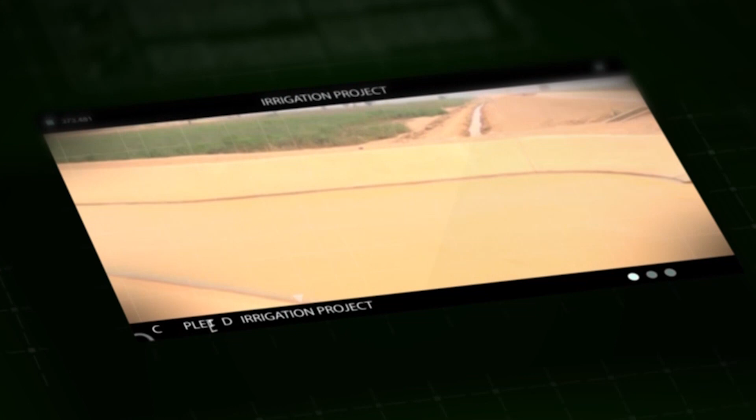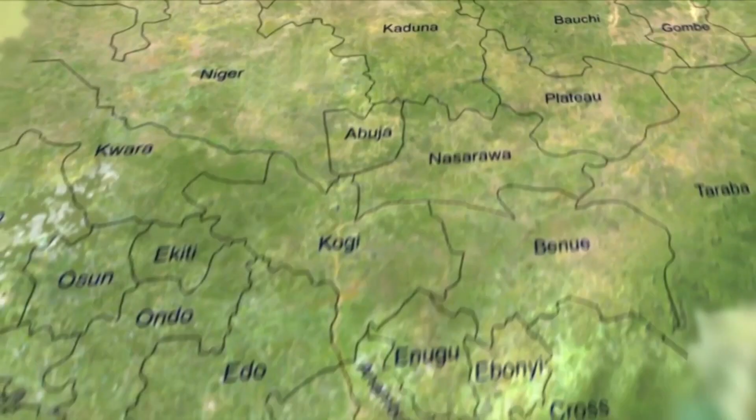The importance of the water resources sector in human life cannot be overemphasized, as it remains dynamic. The strategic position of the sector in Nigeria's socio-economic development has made the Buhari administration place high priority in executing projects in the sector under the Federal Ministry of Water Resources, with the appointment of the Honorable Minister of Water Resources, Engineer Suleiman Hussaini Adamu, in 2015.

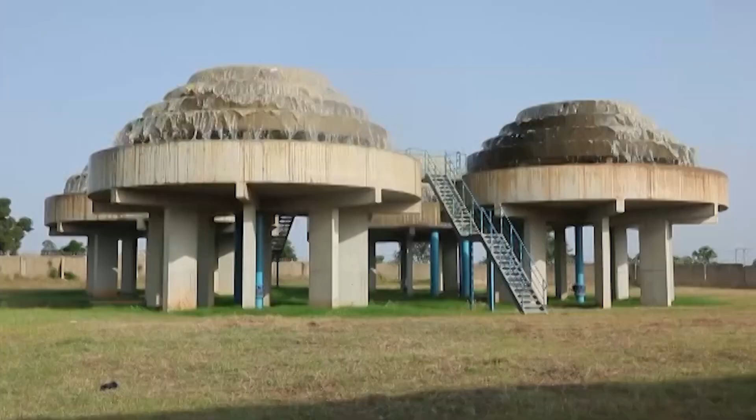As a round peg in a round hole, he went about reinvigorating and revitalizing the sector to enable it to deliver extensively on its mandate and refocus the ministry towards ensuring that the country meets not only its developmental requirements but the United Nations Sustainable Development Goals by the year 2030.

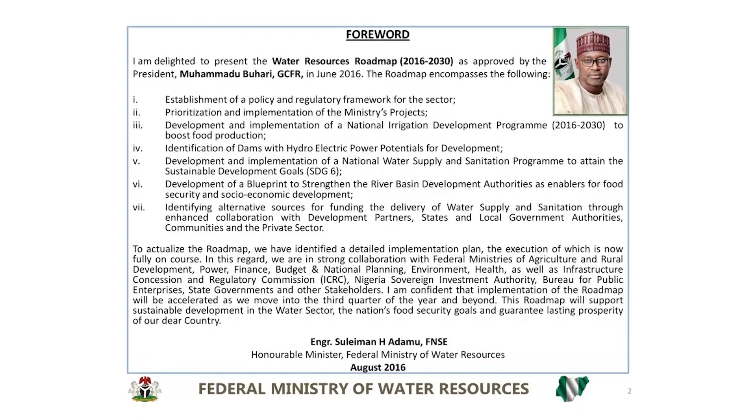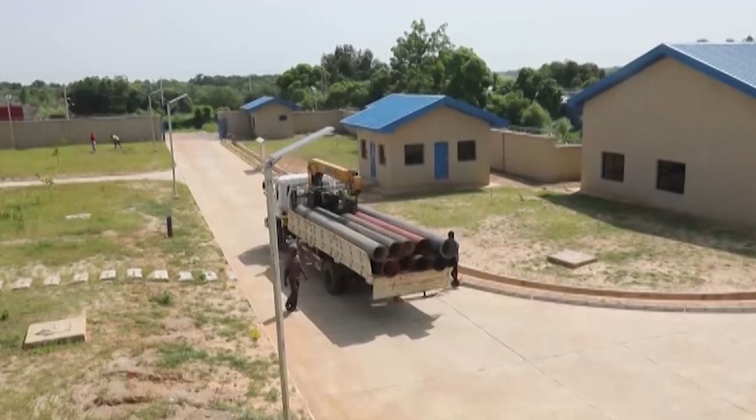A water resources roadmap was instituted by the Honorable Minister to guide the process of revitalizing the ministry. A major component of the reform process is the repositioning, professionalization, and revitalizing of the river basin authorities.

The Upper Benue River Basin Development Authority is one of the 12 river basins established under Decree No. 25 of 1976, amended by Decree No. 35 of 1987, with a catchment area of approximately

257,606 square kilometers. The authority's operational area covers 9 senatorial districts comprising Adamawa Central and Southern Senatorial Districts, Bauchi South Senatorial District, and the whole of Gombe and Taraba states in northeastern Nigeria.

The vision of the Upper Benue River Basin Development Authority is the provision of water for multi-purpose uses within its area of jurisdiction, with a mission of strategic objectives for exploration, exploitation, and conservation of water in a sustainable manner within the context of the National Water Resources Master Plan, brilliantly initiated by the Honorable Minister of Water Resources, Engineer Suleiman Adamu.

He came up with a 15-year program to revitalize the water resources sector, and that's what we're working on. It involves instituting all the necessary policies, legal frameworks, and legislation to move the sector forward,

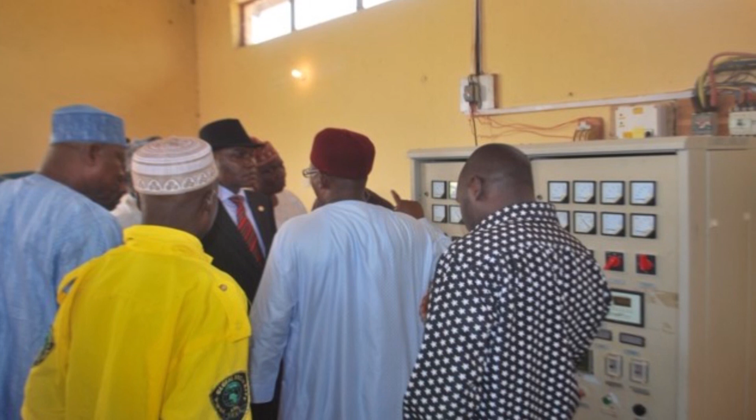The authority has well-trained personnel at the headquarters, area offices, and project sites, with national and international reputation, who have been involved in project conceptualization, studies, design, and implementation of World Bank Transforming Irrigation, UNIDO IC SHP, USAID-sponsored studies, design of hydropower projects, NEWMAP, bathymetric survey of the Benue River, and the National Water Resources Master Plan.

The Managing Director of Upper Benue River Basin Development Authority is Engineer A.H. Moazu, Fellow of the Nigerian Society of Engineers, Fellow of the Nigerian Institution of Civil Engineers. A seasoned engineer, hydrologist, and consummate administrator, he speaks further on the significant milestones of his agency.

Upon coming into office, I gave priority to revitalizing our mandate projects that were existing since the establishment of the organization in January 1976.

When the organization was established specifically for harnessing and development of water resources infrastructure, especially irrigated agriculture for sustenance of the teeming populations of the country, it also engages in community projects whereby farmers can be assisted to conduct their own irrigation within their own farmlands by drilling tube wells, providing them with water pumps, and also provision of farm roads so that farmers can evacuate their produce.

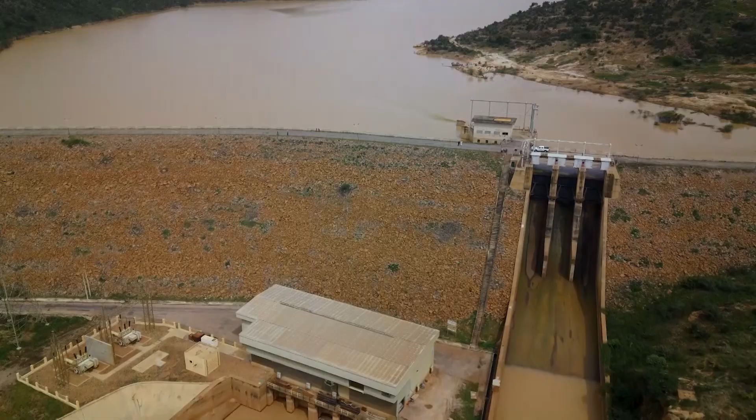Among the numerous accomplishments of the Upper Benue River Basin Development Authority is the completion and maintenance of the Dadinkowa Multipurpose Dam and Irrigation Project located in Gombe State. About the third largest dam in Nigeria, the Dadin Kowa Dam has about 2.8 billion cubic meters storage capacity of water.

It is designed to provide these services: to irrigate 44,000 hectares gross, to generate 40 megawatts of electricity, approximately 259 GWh per year, to produce 20,000 tons of fish annually, to provide raw water to Gombe regional water supply, about

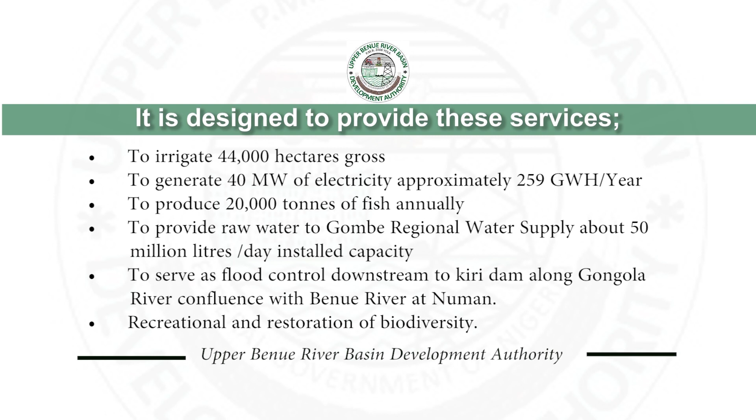50 million liters per day installed capacity, to serve as flood control downstream to Kiri Dam along the Gongola River confluence with the Benue River at Numan, and for recreation and restoration of biodiversity.

Other milestones in the project include the powerhouse for the 40 megawatt hydroelectric power, completed in 2020, generating power into the national grid, ready for commissioning; and 2,000 hectares of land for irrigation by gravity under construction by the World Bank Transforming Irrigation Project.

A 40-hectare pilot irrigation scheme has been established with 2 solar-powered irrigation pumps at Garin Rafi on the minor irrigation upstream of the reservoir. About 10,050 farming families are gainfully employed under minor irrigation schemes, with over 470 tons of grains equivalent produced annually.

4,118 hectares are being cultivated on the minor irrigation scheme at Dadin Kowa Dam drawback area, with about 28,826 tons of grains equivalent produced annually. Through partnership with RIFAN, CBN and Anchor Borrowers scheme, 200 hectares are being cultivated under rain-fed conditions.

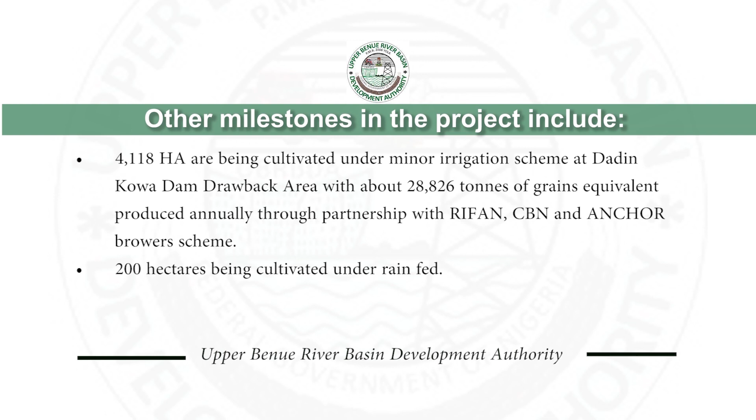It's one of the largest dams in terms of volume, third largest now in terms of volume. The gross volume of this dam is 2.8 billion cubic meters of water at a normal level of 247 meters above sea level. The live storage, that is the usable amount of water you can use on this reservoir, is 1.77 billion cubic meters of water, which is what electricity, irrigation and water supply can tap from.

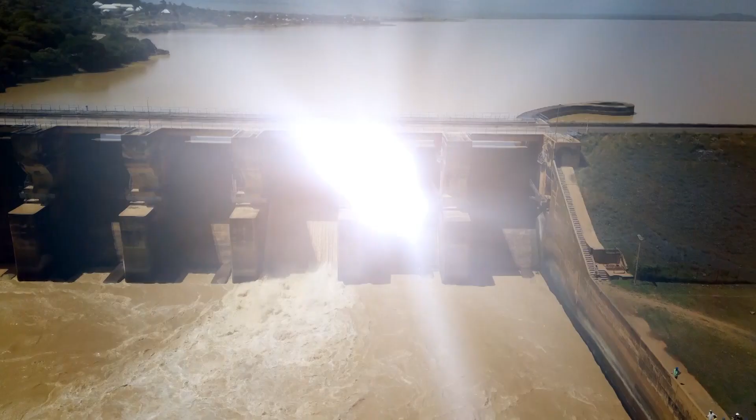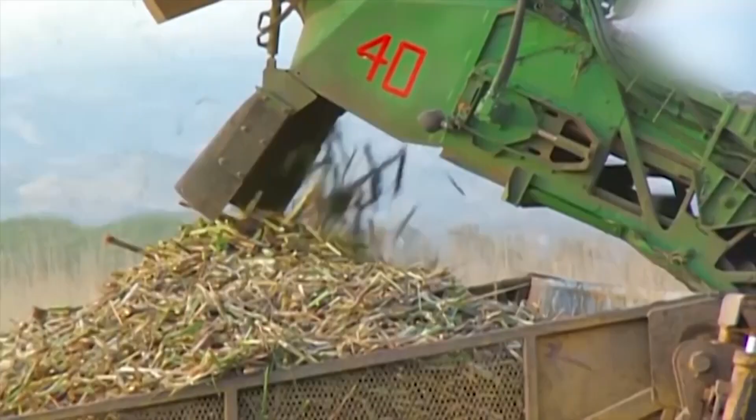Another milestone achievement is the Kiri Dam and irrigation project, Adamawa State. The dam was constructed in 1982 for irrigation of 12,000 hectares for Savannah Sugar Company, now Dangote Sugar Company. Achievements: dam completed in 1982, with 615 million cubic meter storage capacity.

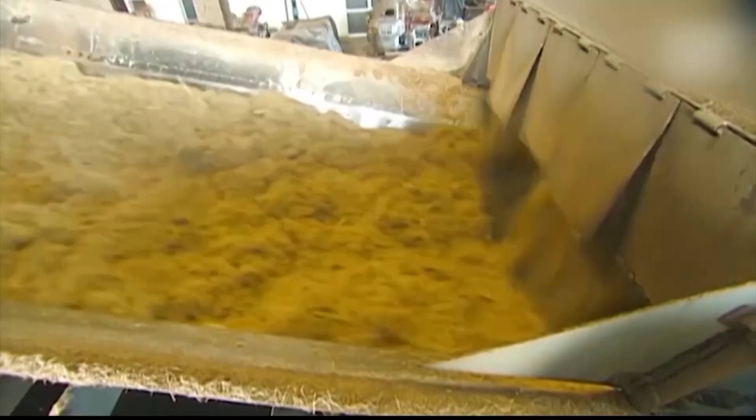Main canal, 13.5 kilometers length constructed. 6.0 kilometers length canal lined. 7.5 kilometers length unlined canal maintained annually. 16,000 hectares of savanna sugar plantation provided with irrigation water. About 150,000 tons of sugarcane produced annually. Over 120,000 jobs created. Fishing development enhanced, with about 12,000 tons of fish harvested by local fishermen annually.

Adamawa State, in partnership with an American firm, plans to produce 25 megawatts of electricity at the planning stage.

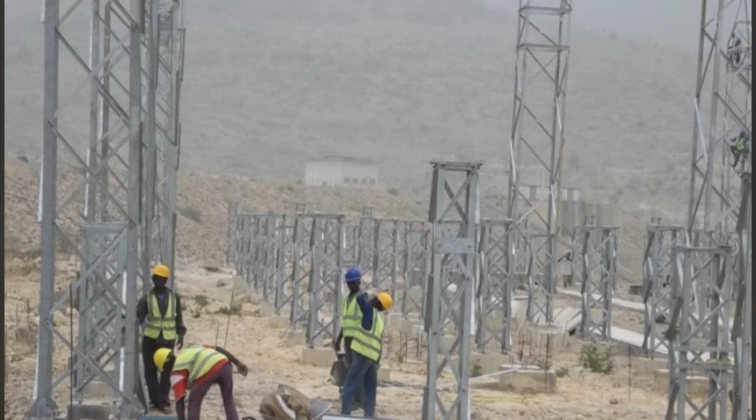Kiri Dam has a capacity of about 615 million cubic meters of water. We have water all year round for irrigation purposes, and the design inflow of the dam is designed to take in water at 4,250 cubic meters per second and a design outflow of 4,000 cubic meters per second. We try to regulate the water within the normal top water level at 170.5 meters down to the lowest drawdown at 167.5 meters of water at the reservoir.

It's very useful to our plantation. As a matter of fact, during our peak period, that is the peak of dry season, we use nearly 23 to 24 million cubic meters per month.

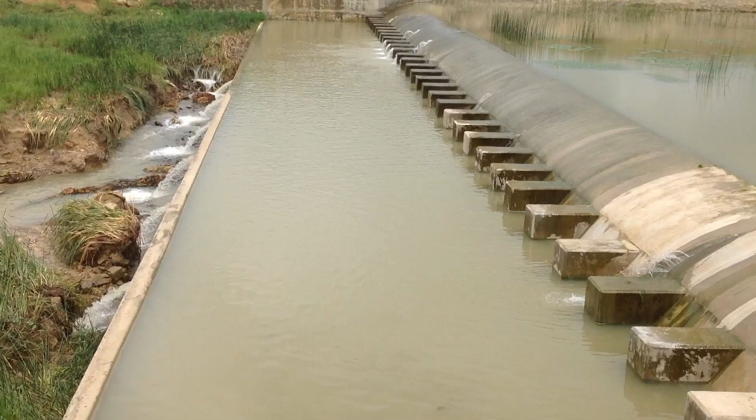The work involves reconstruction of the dam embankment and irrigation scheme development. It also includes construction of the spillway and access road. The spillway is completed while work on the dam is 90% completed. The reservoir has already been impounded.

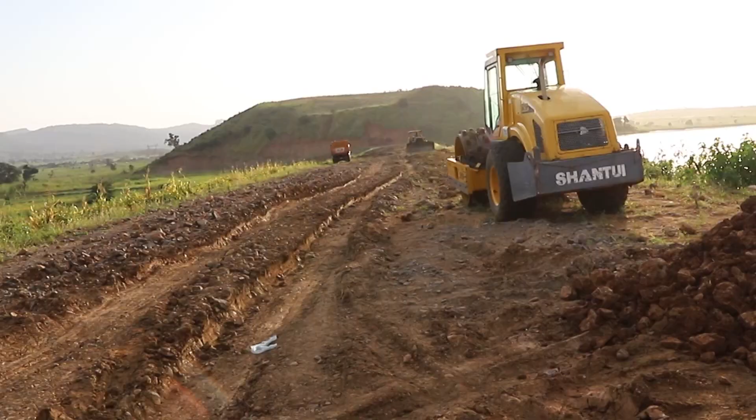Achievements: it serves as water detention for flood control. Development of irrigation scheme for the surrounding communities is in progress. We have about 5.6 million cubic meters of water lying in the reservoir that is potentially to be used for irrigation downstream of the dam.

Presently, the works are still ongoing with about 78.9% completion on the embankment and other components of the dam. The spillway is 100% completed.

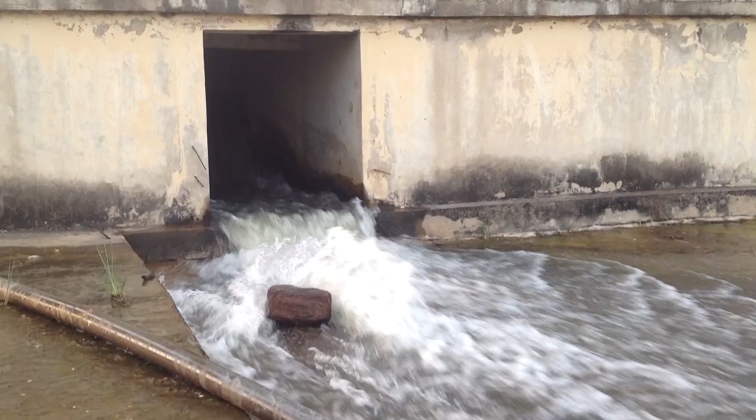Waya Dam Hydropower and Irrigation Project, Bauchi State. The Waya Dam is an earth-filled dam located about 25 km from Bauchi town in Bauchi State. It has a total storage capacity of over 30 million cubic meters.

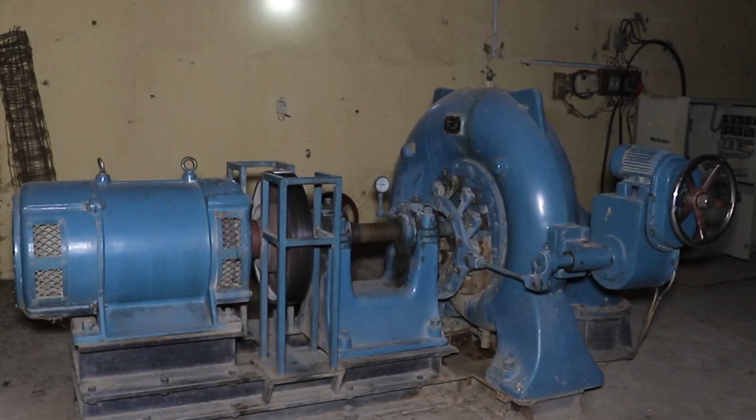The aim of the project is to encourage the development and provision of small hydropower projects to meet the energy requirements of rural communities who do not have access to power supply from the national grid. This is expected to stimulate economic activities and improve the standard of living of the communities. In addition, it is used for irrigation, fisheries development, as well as augmentation of water supply to Bauchi metropolis.

Achievements: dam completed, 37 million cubic meter storage capacity, small hydropower component of 150 kilowatts installed in collaboration with UNIDO, with 7 communities benefiting: Kimni, Gilliri, Rumde, and Makera.

45 hectares pilot irrigation scheme developed. 309 tons of grains equivalent produced annually. 151 farming families gainfully employed. About 675 jobs created.

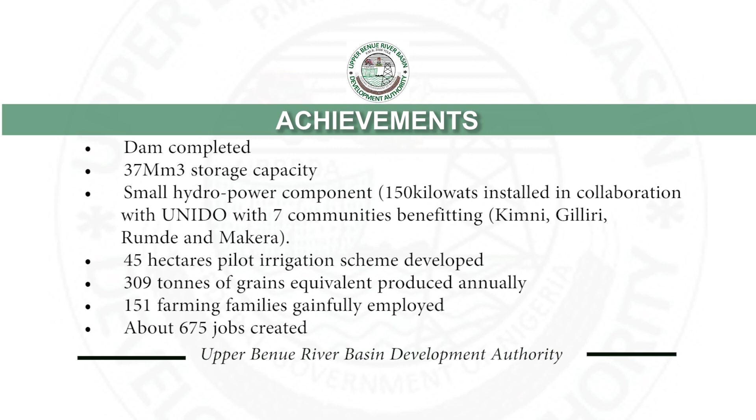Yola Irrigation, Lake Geriyo Project, Adamawa State. This was designed to irrigate 1,200 hectares at Lake Geriyo near Jimeta metropolis.

Achievements: 286 hectares fully under irrigation, 233 hectares being cultivated under rainfed, over 924 tons of grains equivalent produced annually, over 496 farming families gainfully employed, about 1,980 jobs created.

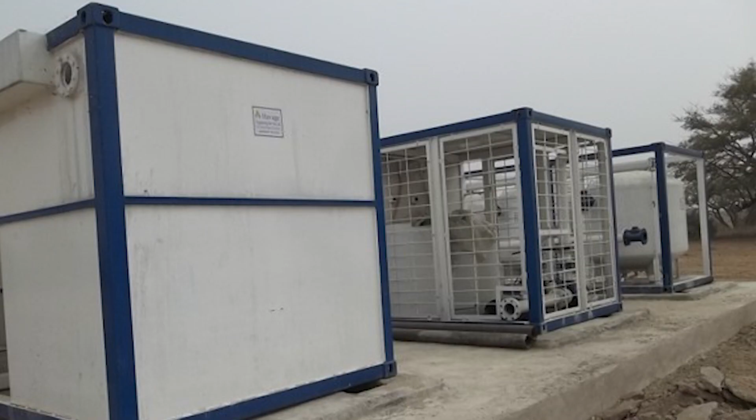Kaltungo Earth Dam, Gombe State. The dam constructed for water supply and flood control. Achievements: 21 million metric cubic storage capacity, dam completed in 2015. Water supply component under construction.

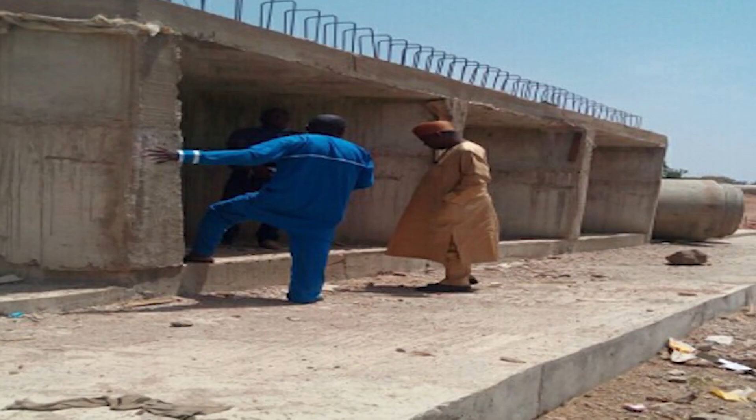Lower Taraba irrigation, Taraba State. Designed to irrigate 38,000 hectares around Gassol and Mutum Biyu in Taraba State, by construction of a barrage at Tella and a 35-kilometer length conveyance canal.

Achievements: 9-kilometer length of protection bund constructed. Over 3,000 hectares developed under rain-fed cultivation by the communities. 250 hectares developed for irrigation. 10 hectares of orchard established. Over 11,550 hectares of land allocated to commercial farmers by the Honorable Minister, Federal Minister of Water Resources. Over 31,000 tons of grains equivalent produced annually.

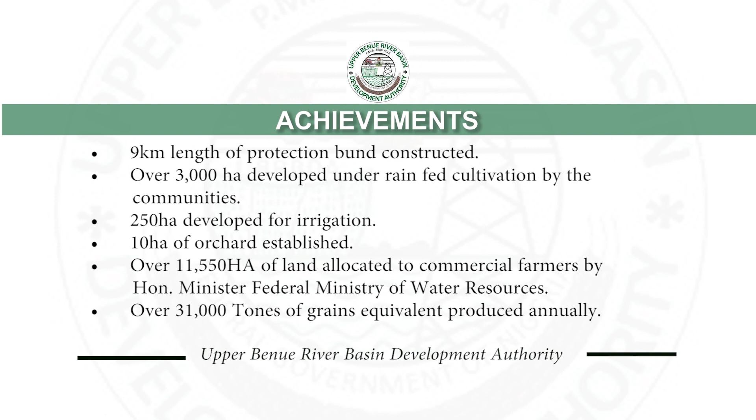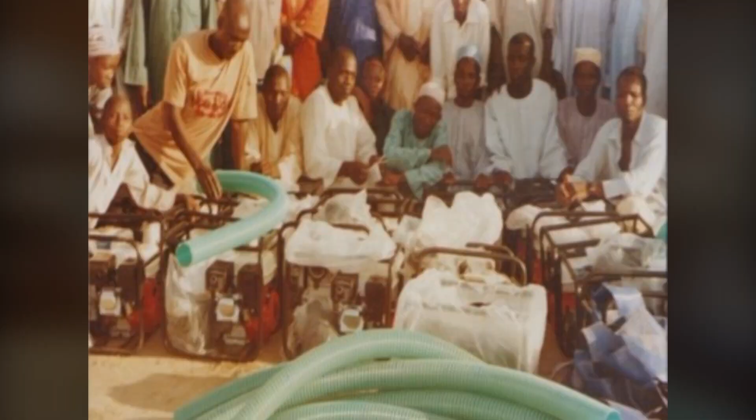Establishment of Songhai Model Farm. The authority established Songhai Model Farm at Tallum, Adamawa; Ruwansanyi, Gombe; Waya, Bauchi; and Gasol, Taraba states. The scheme is designed to increase food security, animal husbandry, fisheries, and empowerment of graduate youth within the authority's area of jurisdiction. Achievements: Tallum, Adamawa State - 40 hectares of land developed for solar-powered irrigation.

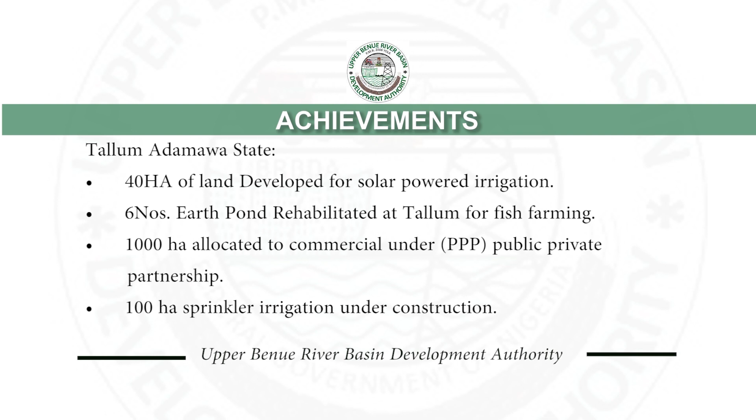6 earth ponds rehabilitated at Tallum for fish farming. 1,000 hectares allocated to commercial farmers under public-private partnership (PPP) arrangement. 100 hectares sprinkler irrigation under construction.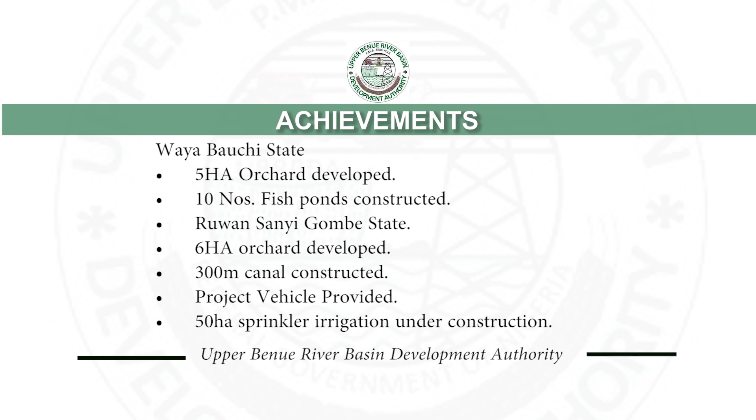Waya, Bauchi State: 5 hectares orchard developed, 10 fish ponds constructed. Ruwan Sanyi, Gombe State: 6 hectares orchard developed, 300-meter canal constructed, project vehicle provided, 50 hectares sprinkler irrigation under construction.

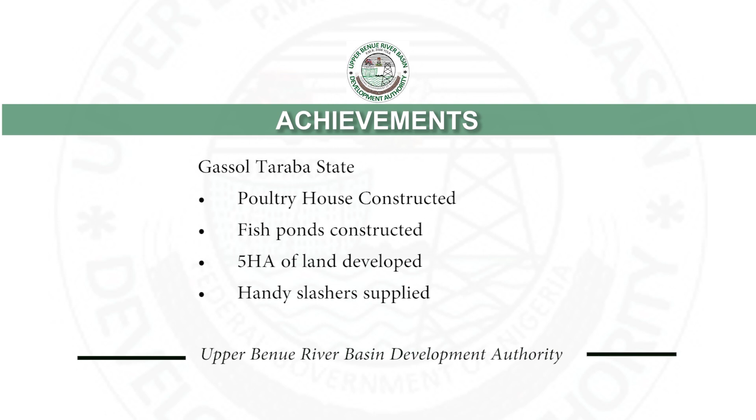Gassol, Taraba State: poultry house constructed, fish ponds constructed, 5 hectares of land developed, handy slashers supplied. It is worthy of note that the Upper Benue River Basin Development Authority embarked on construction of water supply schemes within its catchment areas.

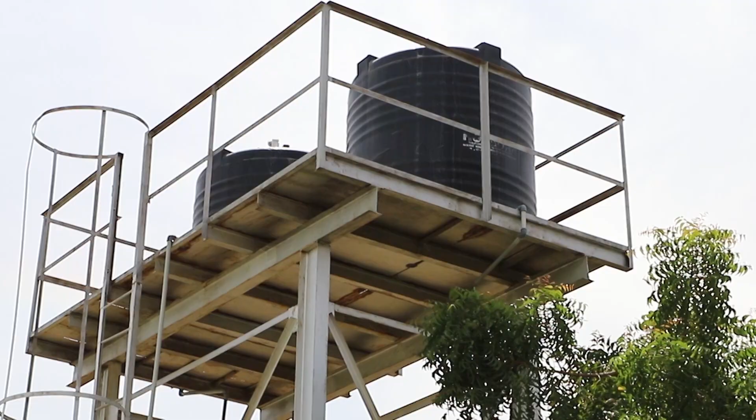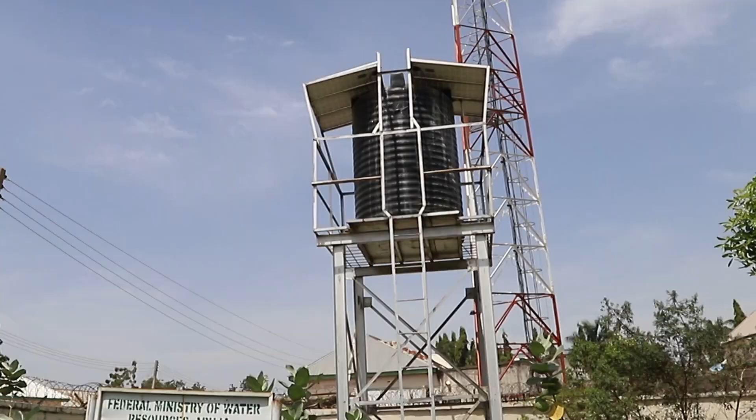Significant water supply schemes for semi-urban areas and villages were completed at various locations within the operational area as follows: Adamawa State, from 2016 to 2021, number of solar-powered and motorized boreholes: 184, beneficiaries: 92,000.

Hand pump boreholes: 1,141, with 342,300 beneficiaries. Taraba State, from 2016 to 2021: solar-powered and motorized boreholes: 41, with 20,500 beneficiaries.

Hand pump boreholes: 536, with 160,800 beneficiaries. Gombe State, from 2016 to 2021: semi-urban schemes: 5, with 50,000 beneficiaries.

Solar-powered and motorized boreholes: 220, with 110,000 beneficiaries. Hand pump boreholes: 271, with 81,300 beneficiaries.

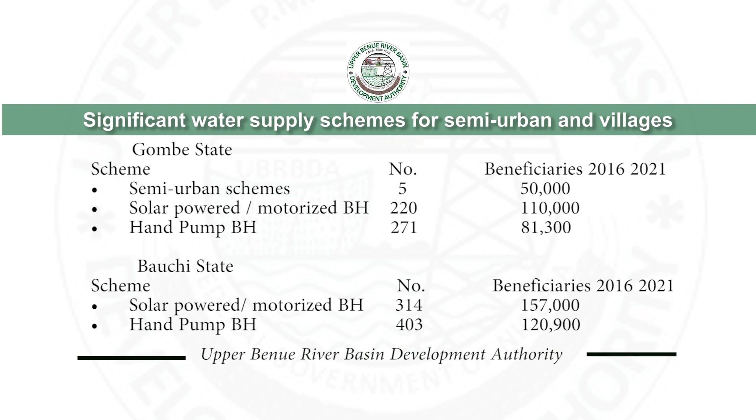Bauchi State, 2016 to 2021: solar-powered and motorized boreholes: 314, with 157,000 beneficiaries. Hand pump boreholes: 403, with 120,900 beneficiaries. In summary, total semi-urban: 5, with 50,000 beneficiaries.

Total solar and motorized boreholes: 759, with 379,500 beneficiaries. Total hand pump boreholes: 2,351, with 705,300 beneficiaries. Grand total: 3,115 projects, with 1,134,800 beneficiaries.

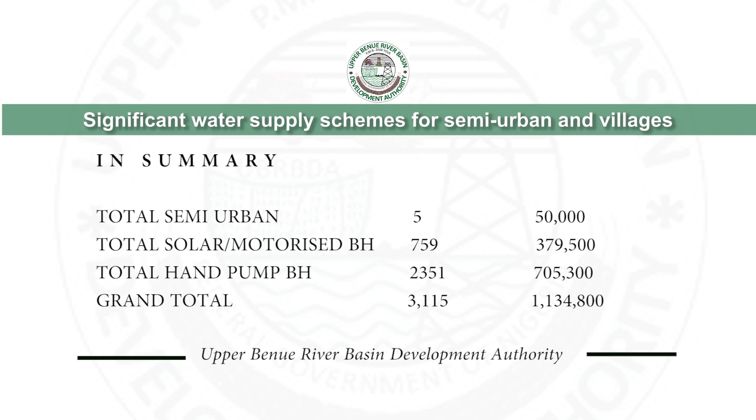Since the establishment of the organization, we have drilling machines and a team that goes to places where we have projects to provide these services as part of community social responsibility. Apart from our own intervention through our own capital appropriation for underground water development, we also drill boreholes to communities within the catchment areas where we have projects.

Ongoing construction project by the Upper Benue River Basin Development Authority. The authority has a number of ongoing construction works as follows: Reconstruction of Cham Dam and irrigation - construction has reached 80% completion.

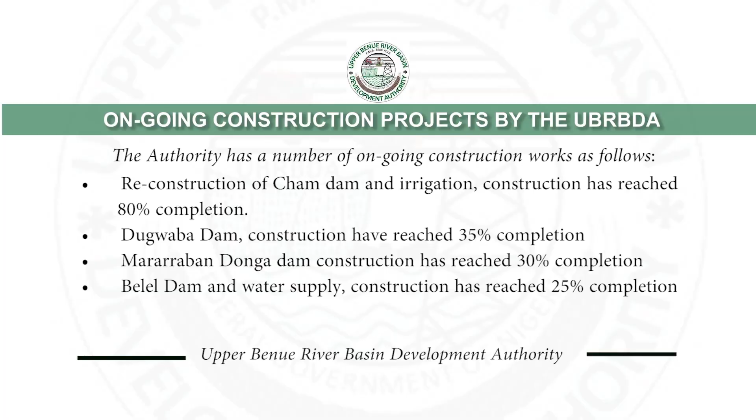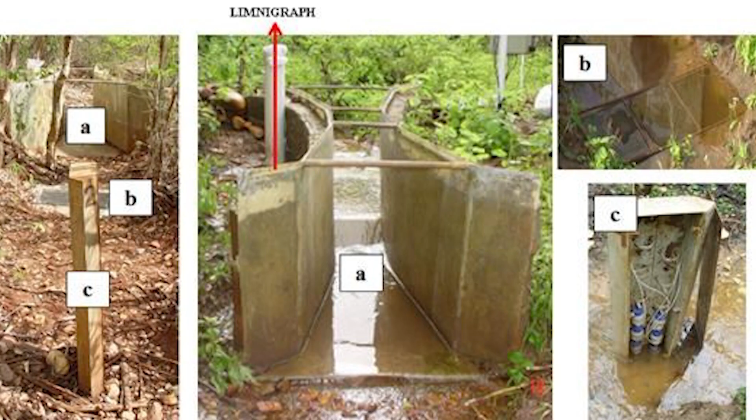Hydrometeorological activities: From inception in 1976, the Upper Benue River Basin Development Authority has about 68 water gauging stations for collection, computation and analysis of hydromet data, which is published in the form of yearbooks and digital data. This has helped in monitoring and maintaining water levels through the stations along the River Benue and its tributaries.

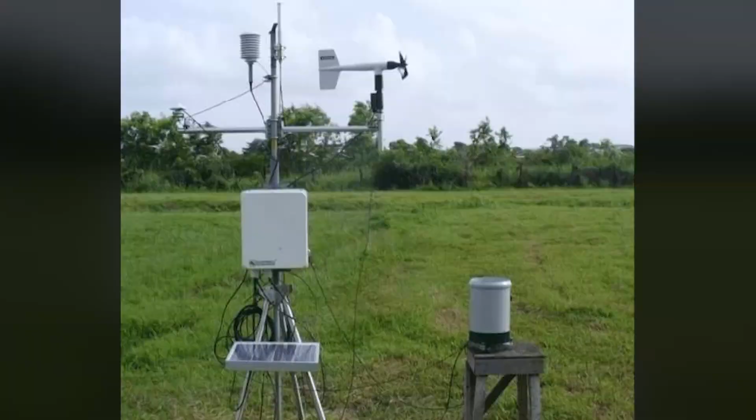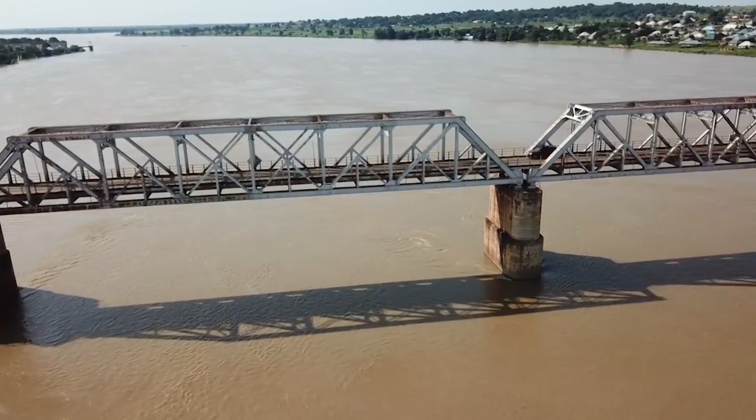To aid discharge and cross-sectional measurement on the River Benue and its tributaries, the authority has 2 automatic weather stations donated in 2017 by Adamawa State University, installed at Yola and Kiri Dam, to enhance collaboration and research on data for the planning processes.

The authority also procured and installed a Davis Vantage automatic weather station at Dadinkowa Dam in 2019.

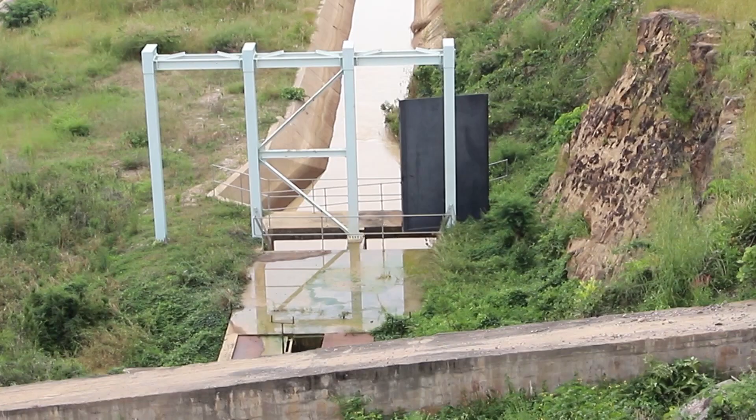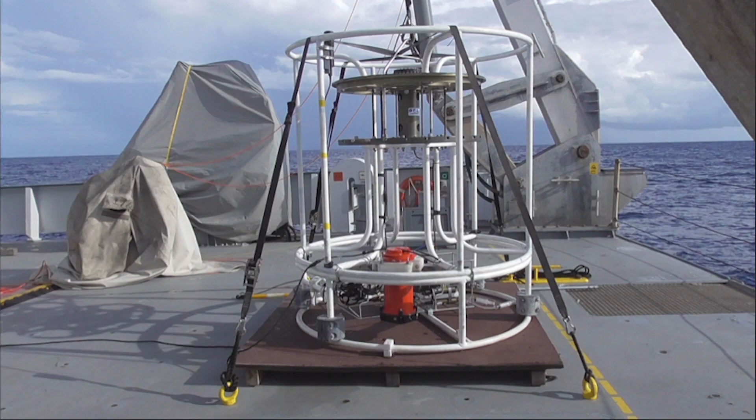Additional 3 numbers were procured and installed at Gembu, Gasol, and Bauchi in 2019. Furthermore, an acoustic Doppler current profiler (ADCP) automated discharge measuring equipment, as well as fibre boat, were procured by the authority for the hydrology units.

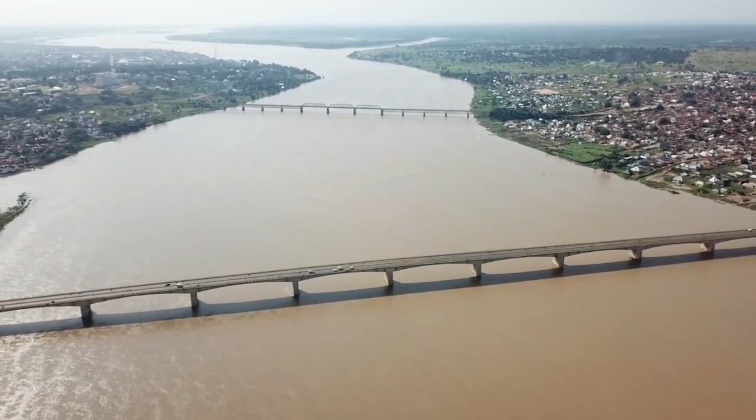The basin has extensive potentials for future development. Apart from Benue River, which is one of the 2 major rivers in the country, the authority's operational area is drained by 8 rivers, namely Mayo Inne, Mayo Belwa, Kilange, Taraba, Donga, and Suntai on the southern bank, and Pai and Gongola on the northern bank.

Feasibility studies carried out revealed that within the operational area of this authority, water resources potential exists to the tune of 55.5 billion cubic meters. To harness these potentials, a dam is required at each of the following locations: Dasin Hausa, Mayo Inne, Kilange, Dindima, Bagel, Gembu, Suntai, and Barage at Tela.

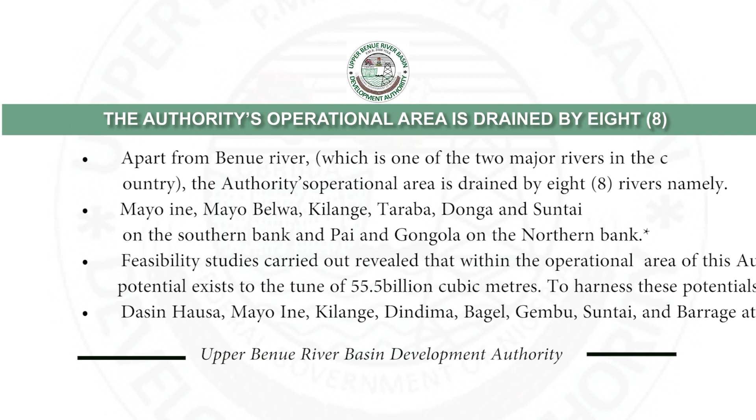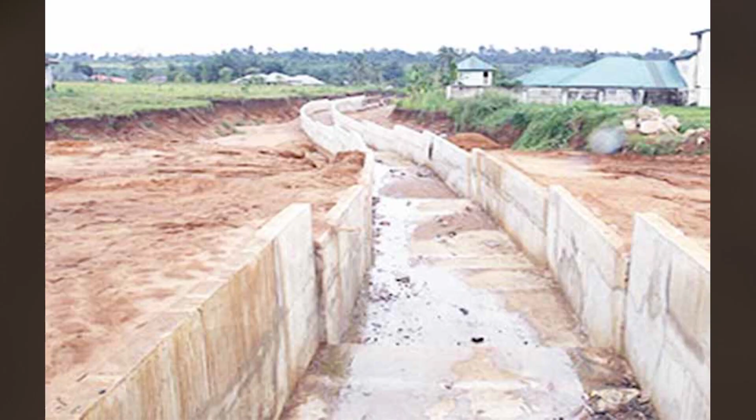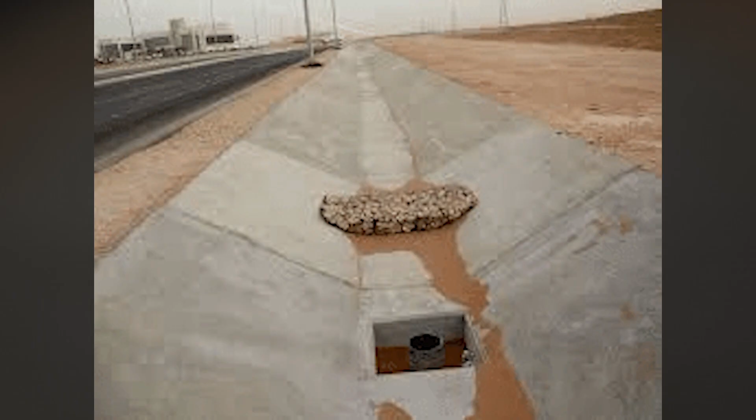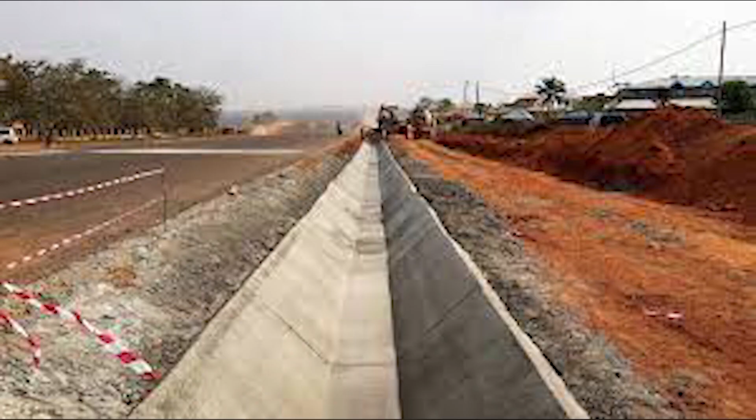Erosion and flood control projects. In the area of flood control and erosion, the Upper Benue River Basin Development Authority has recorded the following milestones: Gombe State, about 4.5 km reinforced concrete lined drainage channel at Tudunwada Shamiki Ward, Gombe, 2019 to 2022; 2.5 kilometer Jankai Bubayero Primary School, Dawaki Ward, Gombe State capital, 2020 to 2022; 5 kilometer Duku Erosion and Flood Control Projects, 2018 to 2019, Duku Town.

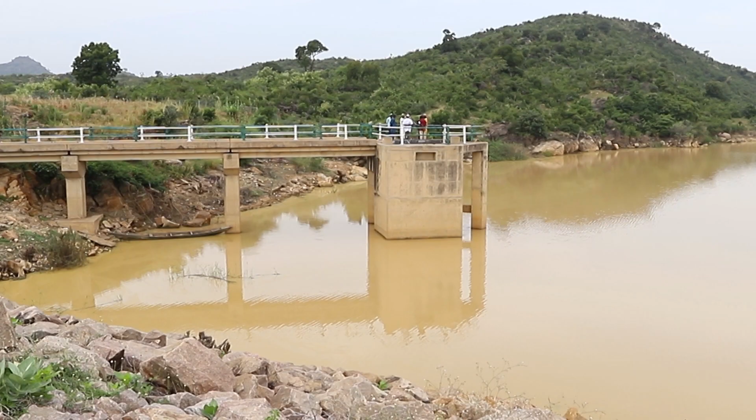Small earth dams at Gobia, Bogoro, Tafawa Balewa local government area of Bauchi State, 2016 to 2021, approximately 30 million cubic meters. Ledde Zange Small Earth Dam, Duku local government area, for domestic and livestock development, 10 million cubic meters, 2018 to 2021. Rehabilitation of 5 existing small earth dams at Bauchi and Gombe states for minor irrigation and livestock, 2019 to 2021.

In almost all the state capitals, in Yola here this year we have one erosion control project to be constructed. In the 80s there were a lot of erosion and flood control projects that were funded by Ecological Fund, but now the authority is funding 2 erosion and flood control projects in Gombe Town.

And we have done one in Duku local government headquarters. PWASH, the Partnership for Expanded Water Supply, Sanitation and Hygiene, is a national collaboration for the improvement of access to water supply and sanitation in Nigeria through a structured multi-sector partnership.

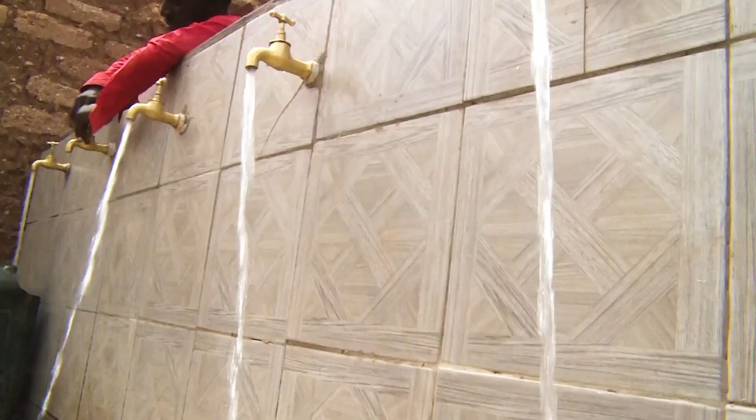PWASH is designed to build on previous efforts and complement existing water supply and sanitation strategies by instituting a coordination and prioritization framework for project delivery.

The Upper Benue River Basin Development Authority was able to achieve a lot by establishing a PWASH desk in 2019, and constructed 15 PWASH model toilets with attached boreholes across the 9 senatorial districts: 4 in Adamawa, 3 in Bauchi, 5 in Gombe, and 3 in Taraba states. All these projects were executed according to PWASH standard.

I must express my gratitude to them for doing it, because we have more than 4,000 people in this school. Before then, our people were suffering for water and toilets. But because of that, we really appreciate and express our gratitude to the Upper Benue Basin Authority.

The toilets constructed in Adamawa State include Wuro Hausa Primary Healthcare Center and Maternity, Yola Town, toilet and rehabilitation of boreholes; Damare Primary School, Yola Town, with a new solar-powered borehole; Government Girls Secondary School, Yola, with rehabilitation of borehole.

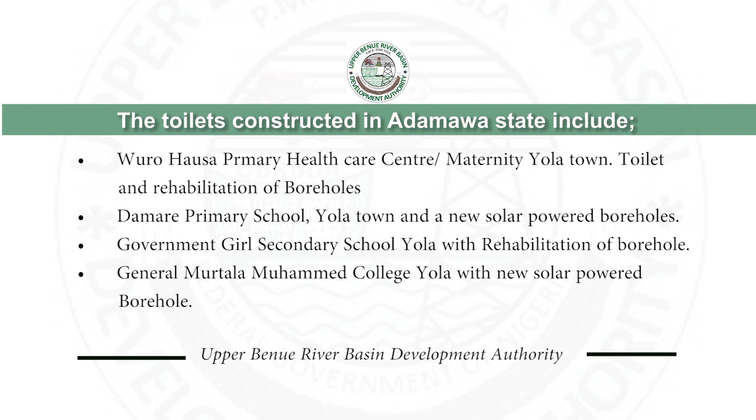General Murtala Muhammed College, Yola, with new solar-powered borehole. Bauchi State: Government Girls Secondary School, Bauchi, with new solar-powered borehole; Government Secondary School, Angwang Borno, Bauchi, with new solar-powered borehole; Government Secondary School, Salemanga, Bauchi, with new solar-powered borehole.

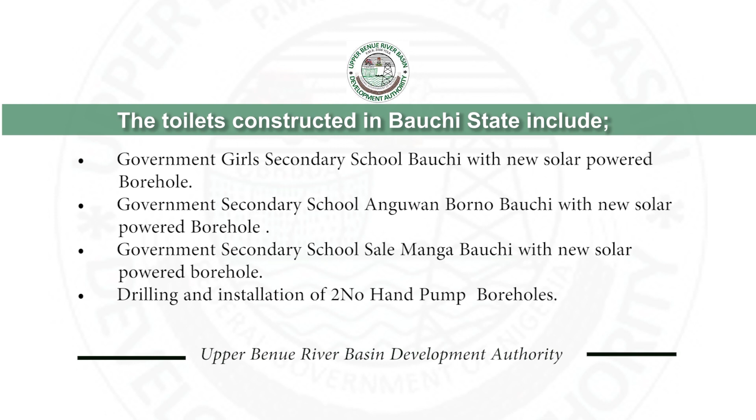Drilling and installation of 2 hand pump boreholes. Gombe State: Government Science Secondary School, Gombe, with rehabilitation of borehole; Tudunwada Primary School, Gombe, with rehabilitation of borehole; Zainab Bukachua Health Center, Gombe, with new solar-powered borehole; Primary Health Center, Kagarawal, Gombe, with new solar-powered borehole; Vocational Training Center, Gombe, with new solar-powered borehole.

Taraba State: Muhammad Inya Primary School, Jalingo, with new solar-powered borehole; Turaki A Maternity, Jalingo, with new solar-powered borehole; Government Day Secondary School, Mal Gabadu, Jalingo, with new solar-powered borehole.

The water in this place is helping the facility. In fact, it's the only water that doesn't stop. It's helping the facility all the time, if there is solar, if there is sunshine.

The PWASH model toilets constructed by the authority within its catchment of 9 senatorial districts number 15, with attached boreholes powered by solar system.

Indeed, the Upper Benue River Basin Development Authority has provided an enabling environment for the creation of jobs for thousands of people in many communities in its catchment area, in line with the targets of the Buhari administration. It is the main hub of economic activity in the area.